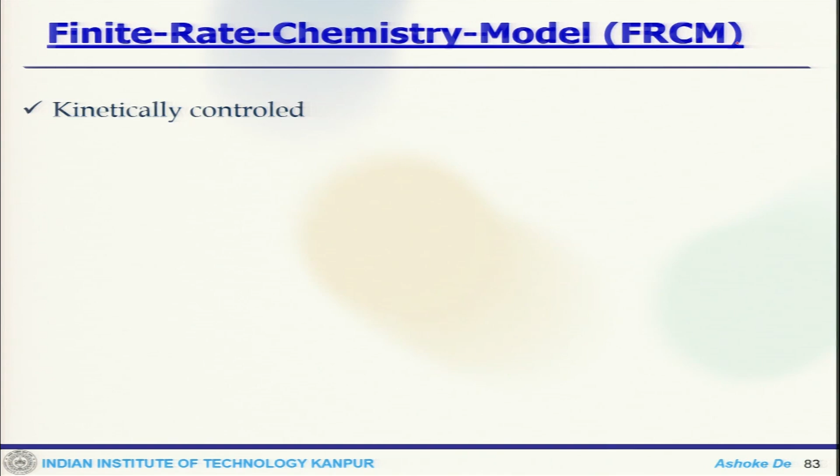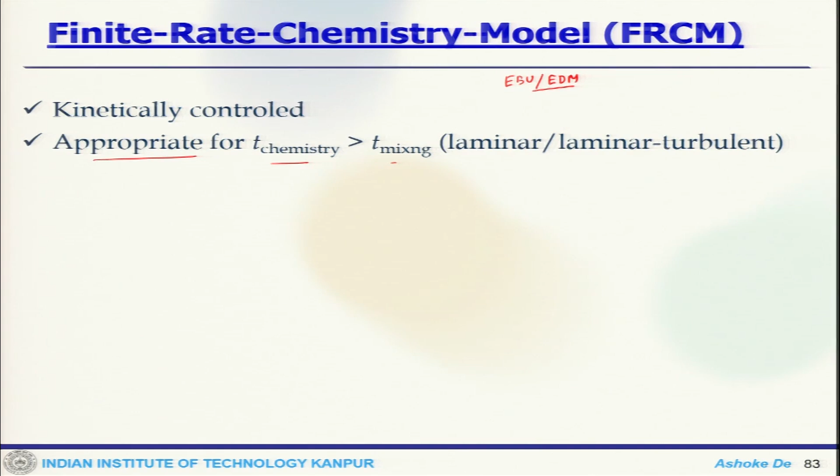Now we will look at the finite rate chemistry based model. This is more or less detailed. One important thing is that previously, when we talked about the EBU or EDM, they are more or less mixing controlled, but this one is kinetically controlled. It means the chemistry actually controls the whole physics. So here it is appropriate if the chemistry time is higher than the mixing time. That means it becomes a laminar or laminar-turbulent interaction kind of situation.

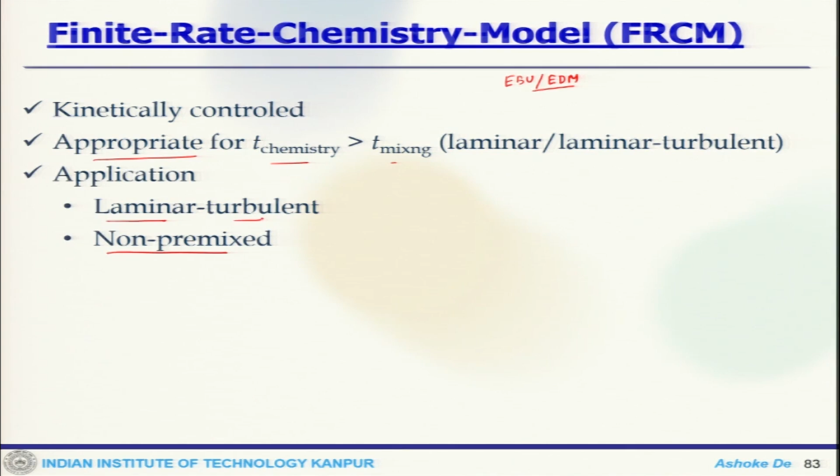Now one can think about the applicability. It can be used in non-premixed mode, laminar case or turbulent case; in either situation this is applicable. And the source term uses the Arrhenius expression. We use the mean values for the temperature in the Arrhenius expression, but importantly, in this case the effect of turbulent fluctuations is ignored. So this is one thing which would be missing when we actually close the source term.

And also when you look at the local temperature, that is also quite low. Compared to the previous models, these are some of the issues that come up here, that it does not account for those things. And also the consideration of non-equilibrium effects and all these things are also missing.

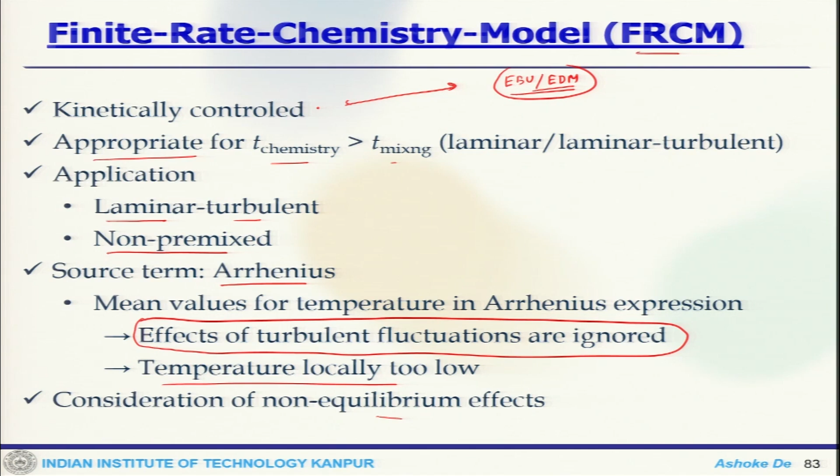So we have looked at the issues of EBU and EDM, and EDM is more mixing controlled, while FRCM is kinetically controlled. So these two are sort of contradicting each other. Now if one combines these two, that would probably be the best possible combination for applications. That is why we talk about this combination of EDM and FRCM. Then we can use it for turbulent flow with high turbulence and intense mixing, and also a laminar structure can be handled easily, because we are trying to take the advantage of both these models.

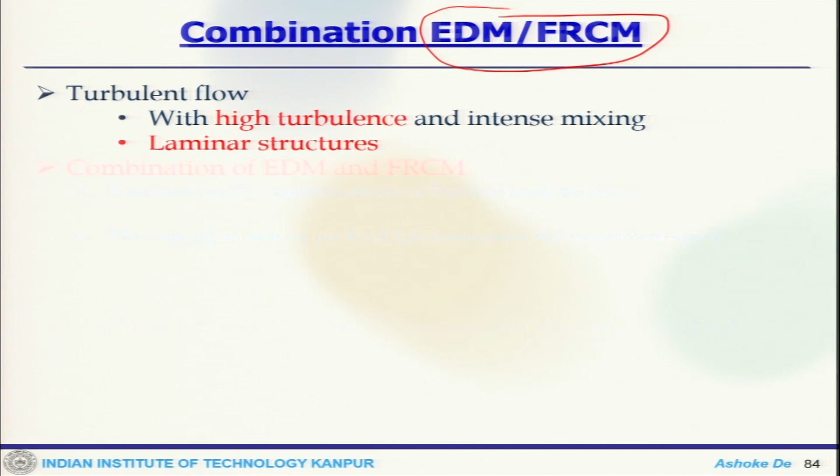So the advantages of these two models are used to get this closed. When you combine them, for each cell the computation of both reaction rates is done: one using EDM and one using FRCM. Then, to determine the reaction rate, we pick the smaller of the EDM and FRCM rates, and look at the local chemistry and mixing control situation, whether it is a kinetically controlled situation or a mixing controlled situation.

So obviously you get some advantages and you also pay some price. There is a large range of applicability. This is one of the biggest advantages; once the application range increases, that is one of the best things one would expect. But the disadvantage is that there is no turbulence chemistry interaction. So though we are coupling these two models and taking their advantages, there still remain some issues.

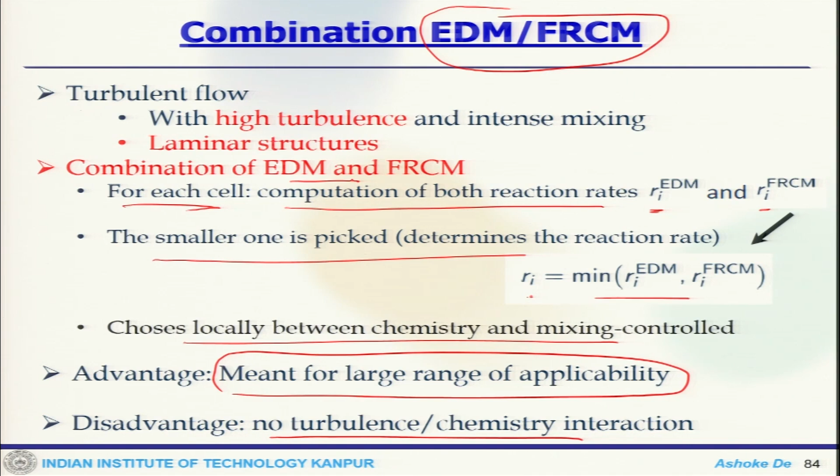So the further modification which was proposed is the eddy dissipation concept, which is an extension of the EDM. EDM does not take into account detailed chemistry, but EDC can consider detailed reaction kinetics. That means it can take multi-step reaction chemistry into consideration.

What it does is, if you have a computational cell like this, you divide it into a small section. This is your reaction zone and this is your mixing area. So the cell is divided into two segments. One is the reaction zone, which is a fine scale structure; these reactions happen on the small scale, called the fine scale, and that is estimated like this. C_xi is the model constant, and the volume of the cell would be xi cubed.

So, reaction rates are determined by obviously the Arrhenius reaction, because that takes into account all the detailed chemistry, and then the time scale of the reaction, which is also estimated as tau, which is C_tau into square root of nu by epsilon. This is also a model constant.

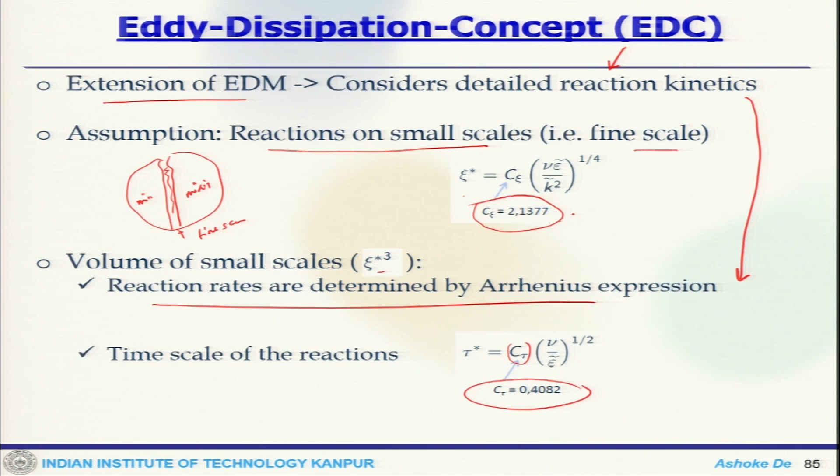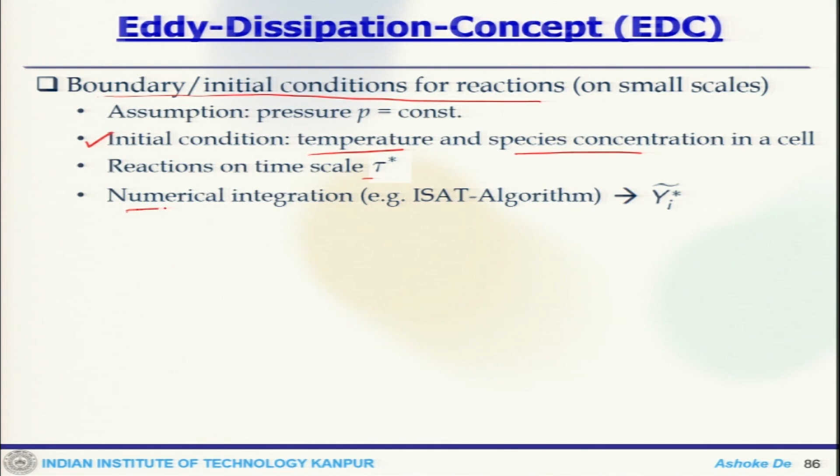Now, once you have this, you need the boundary and initial condition for the reactions. So, one of the assumptions is that you have a constant pressure situation, that means it is sort of an isobaric combustion, and then you need some initial condition which is quite important, that is for temperature and the species mass fraction or molar concentration, whatever it is. Then we need the reaction time scale and then the numerical integration. One of the algorithms proposed by Pope is the ISAT algorithm, which is quite efficient for this numerical integration.

Still, if you look at it globally, this has a huge advantage from the application point of view. It can be applied to premixed, non-premixed or partially premixed cases, but it has problems when you apply it using detailed kinetics. Obviously when you use more detailed kinetics, your computational cost would go up. So, the resource requirement becomes quite high, and at the same time the integration of the reaction source term will lead to stiff differential equations when we try to integrate the species mass fractions.

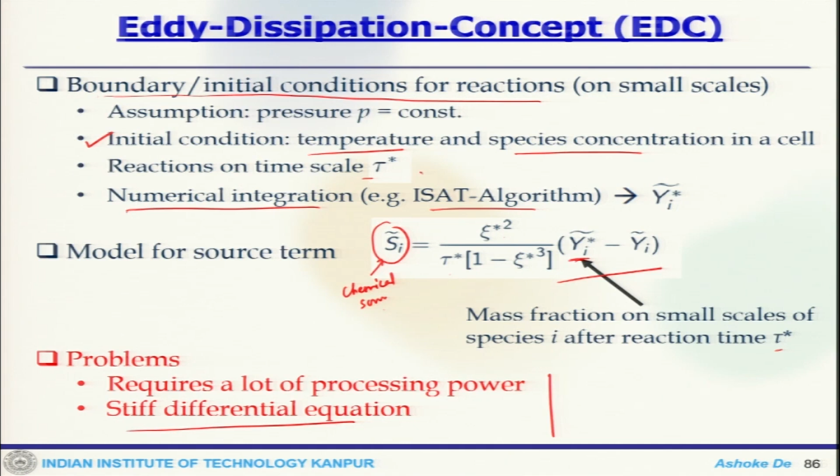But there are ways to handle it, because these days computational power is quite handy due to the advancement of the architecture and all these things. But the differential equation solver is another area of concern, where actually the ISAT algorithm has been found to be quite effective.

Now, if we sum up the discussion of this first part, first we look at the laminar finite rate, where the major issue is that turbulence is not considered, and the reaction source term is calculated by the Arrhenius equation. Now, if you go to finite rate or eddy dissipation, there again we use the Arrhenius expression for the calculation of the source term, and we calculate the mixing rate, and the local choice of whichever is limiting is used. Now the eddy dissipation is solely a calculation of the mixing rate. Here the kinetics is not considered.

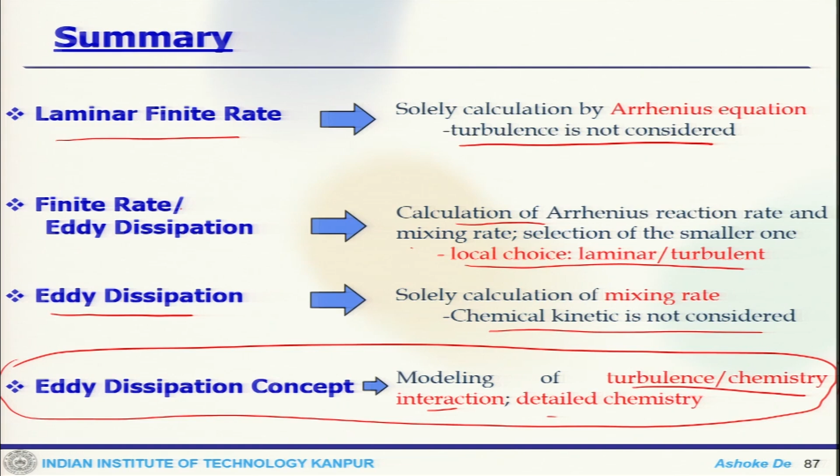So, this case is mixing controlled, and then finally we get the eddy dissipation concept, where the actual interaction between turbulence and chemistry is taken into consideration, and detailed chemistry can be used. So, all said and done, this looks quite advantageous, and the applicability is also quite high, because one can use this particular model irrespective of mode of combustion. The reason is it solves individual species mass transport equations. So, that gives you the simple models.

Now, we can look at slightly advanced models, which are statistical based methods. So, that would also be quite handy. This set of models we discussed here can theoretically be applied to any mode of combustion, obviously with some advantages and disadvantages, and then there are the ones which are very specific to a particular mode of combustion.

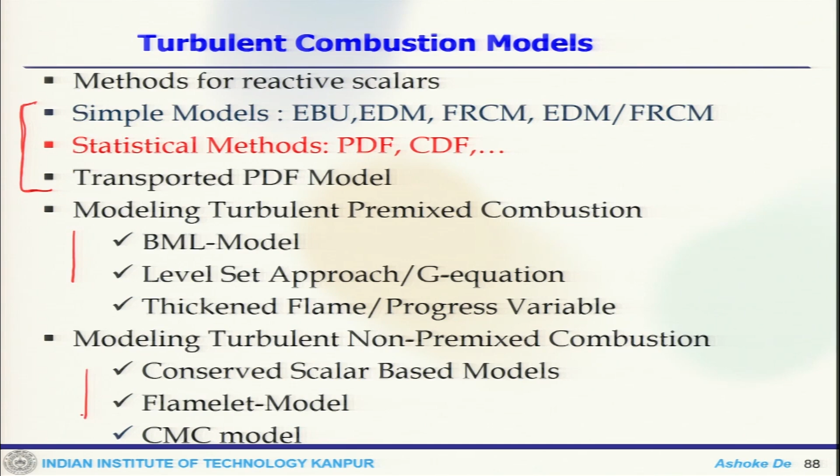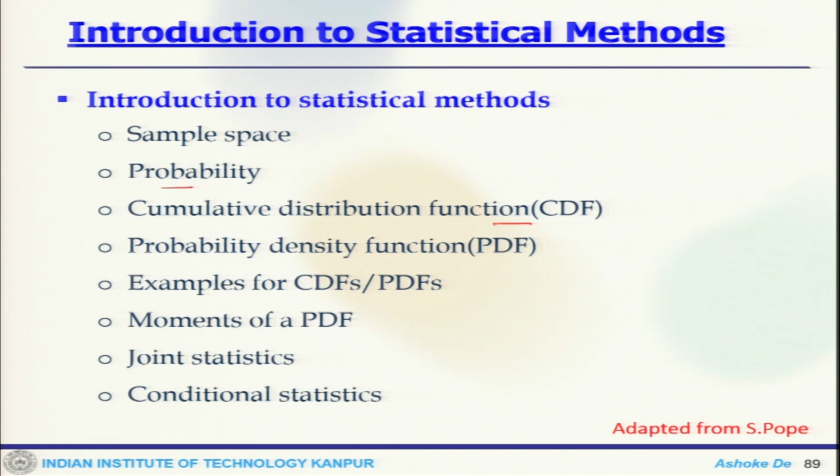Now, we move to the statistical methods, where we can see what the sample space is, what the probability is going to be, the cumulative distribution function, probability density function, moments of the PDF, joint statistics, conditional statistics. These are some of the terminologies required for statistical based models, and this is primarily adapted from Pope. So, now we can look at the probability of an event, the probability in a sample space.

So, what is sample space? Sample space is nothing but the set of all possible events. Now, for a velocity field, you can think of a random variable u, and then the sample space variable v, which is independent of the variable.

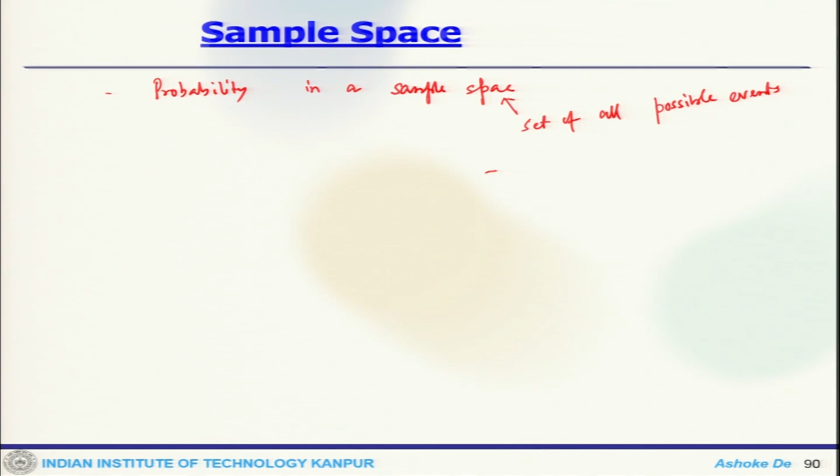For example, if this is my sample space variable v, and this is, let us say, event A, then A is u less than V_A. Similarly, one can look at event B, where in this sample space there could be V_A and V_B, and event B is where V_A is less than or equal to u less than V_B. So, this is how you define the sample space.

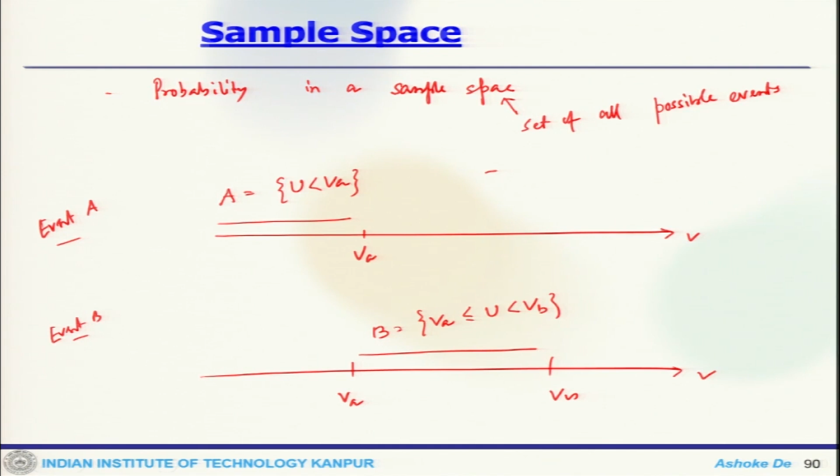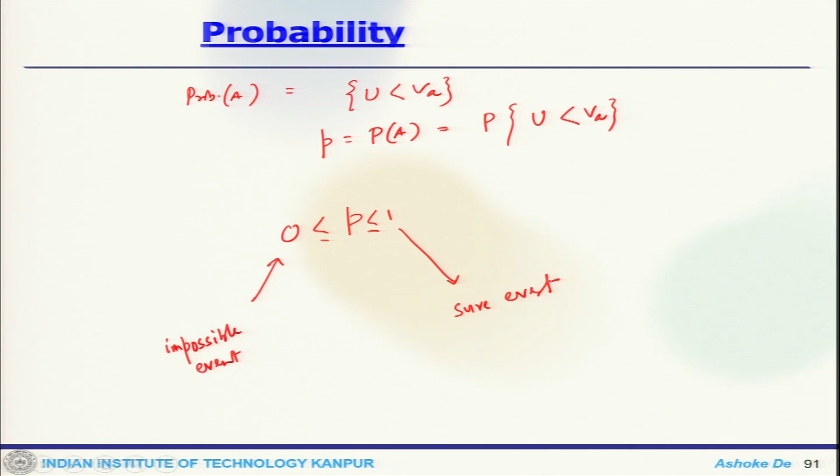Now, the probability of event A would be u less than V_A. That means P(A), the probability of A, is P(u < V_A), and the probability P lies between 0 and 1. When it is 0, it is an impossible event, and when it is 1, it is a sure event. So, that basically demarcates between the two sets.

Now, we look at the CDF, or cumulative distribution function. The probability of any event can be determined from the CDF. So, let us say F(V) is the probability of U less than V. We looked at V_A, where event A is U less than V_A. Then P(A), the probability of A, is P(U < V_A), which is the cumulative distribution function of V_A.

Similarly, for event B, which lies between V_A and V_B, B is V_A less than or equal to U less than V_B. That means U lies between V_A and V_B, and P(B) can be written as P(U < V_B) minus P(U < V_A), essentially the subtraction. So, that is F(V_B) minus F(V_A). That is how one can write two different probabilistic events.

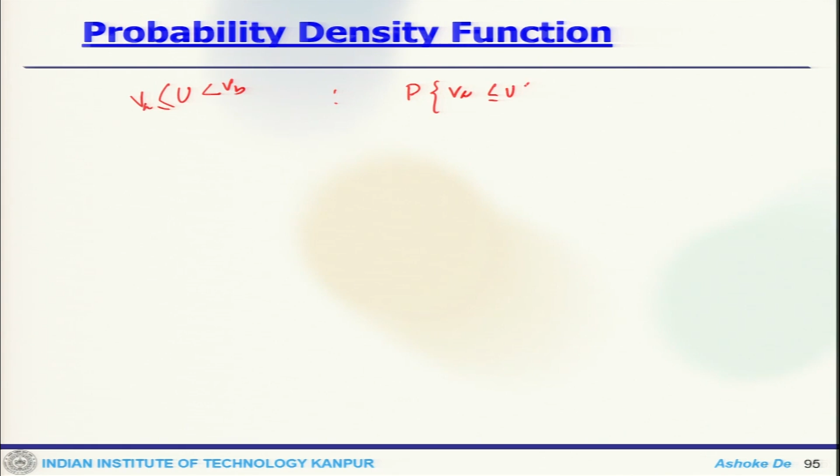So the probability was VA less than U less than VB, which was F of VB minus F of VA. That one can write as the integral from VA to VB of f(V) dV. So if I schematically look at it, this is 0, let us say VA, VB. So the curve, let us say, goes like that, that is 1, this is my F(V).

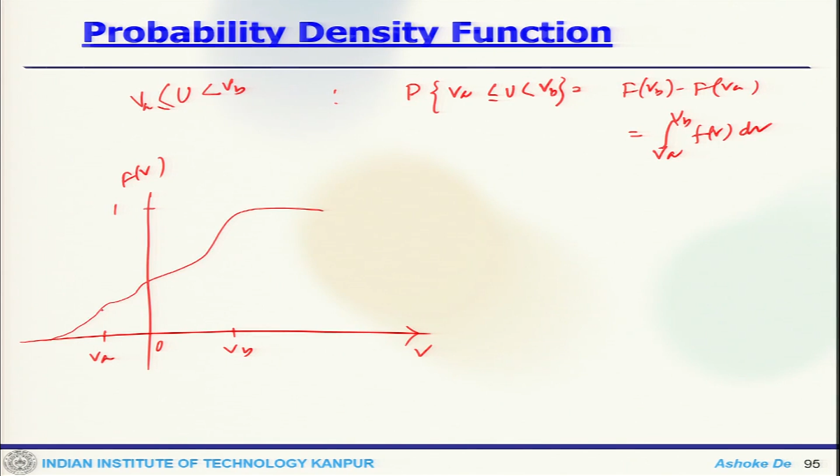So this is my distribution of this guy, and the same thing when I put it back: 0, this is my space V, this is VB, this is VA.

So this is the part which corresponds to it. So in the interval where VB minus VA tends to 0, the probability will be F(V plus dV) minus F(V), which is f(V) dV. So that is how you get the PDF.

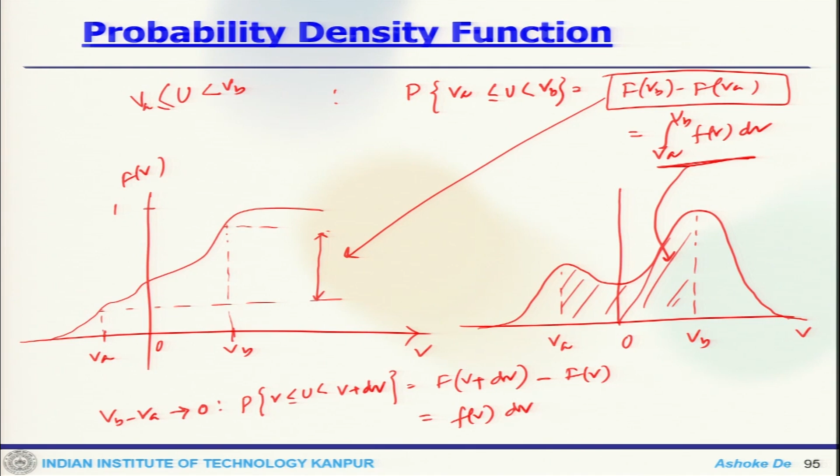Now you can take some examples, like this is a CDF and this is the probability density function. So this is a uniform distribution where the probability distribution between A and B would be 1 by (B minus A), otherwise 0. So this is how it looks, and this is how the CDF varies. So this is a uniform distribution.

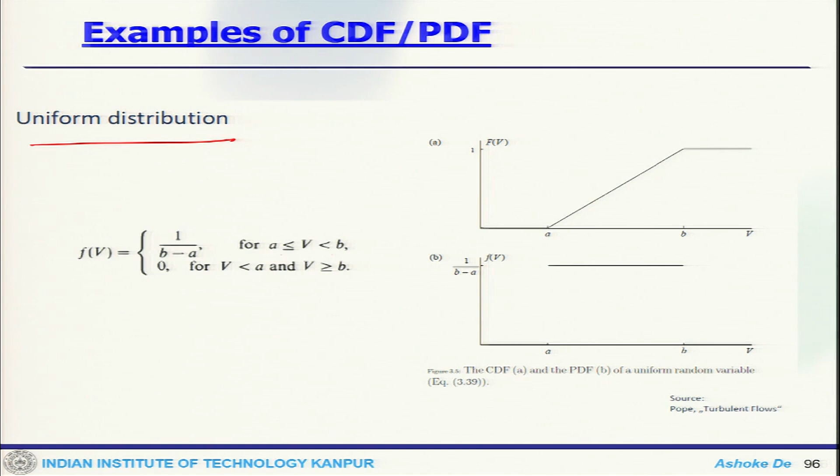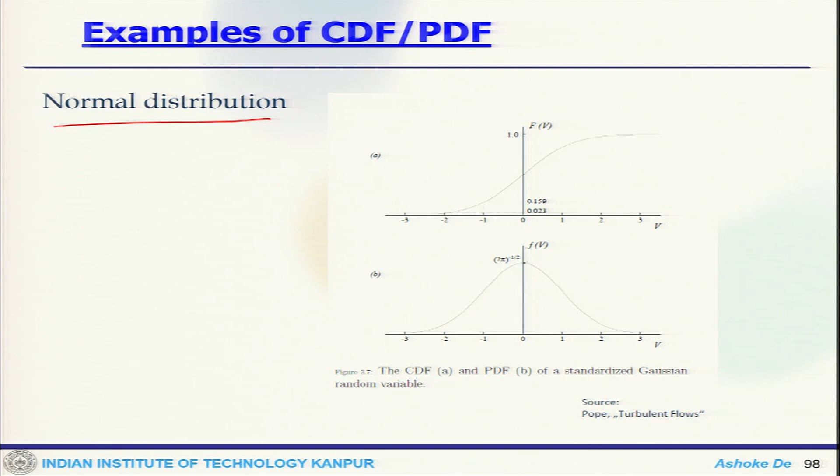Now, if you have, for example, a delta function distribution, that means the CDF is applicable here and applicable there. So, for V less than A it is 0, from A to B it is P, greater than B it is 1. So, that is my CDF. So, this can be written like a function. Now, for the probability distribution, at this point there would be a peak, at this point there would be a peak. So, this is my probability density function of that.

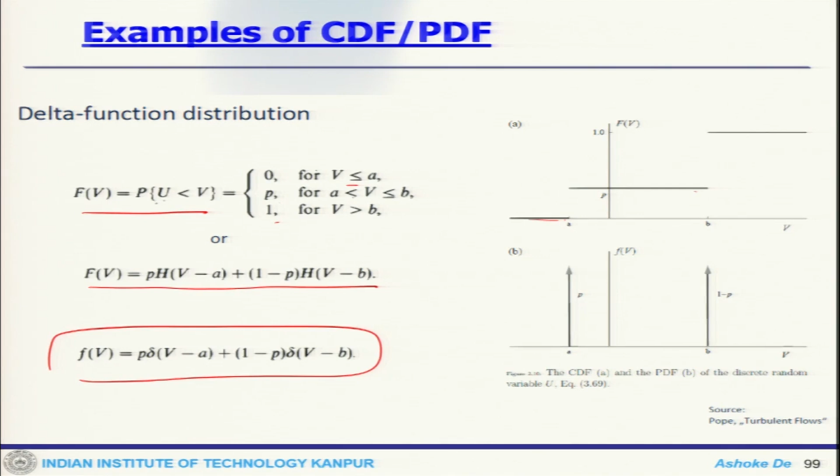Now, let us say the PDF of u is known, then we can find the nth moment. How do you find that? The nth moment would be the integral of v to the power n f(v) dv, and for Q, this is minus infinity to plus infinity Q(v) to the power n f(v) dv, which is the random function with Q equals Q(u).

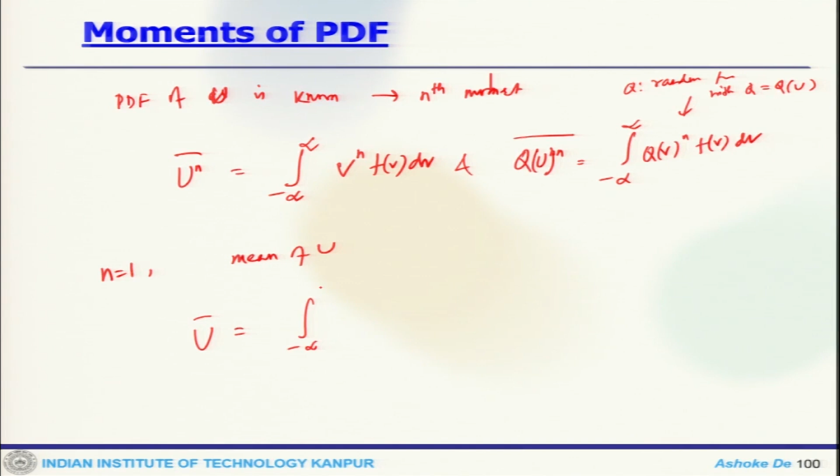Now, you can take the first moment: if n equals 1, then this would be the mean of u. So, u bar would be minus infinity to plus infinity v f(v) dv. Similarly, you can find the nth central moment, which is, let us say, (u minus u bar) to the n, the integral from minus infinity to infinity of (v minus u bar) to the n f(v) dv.

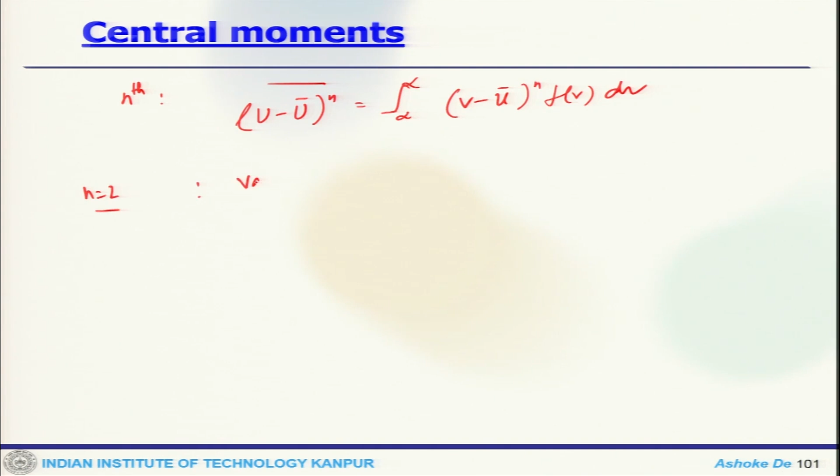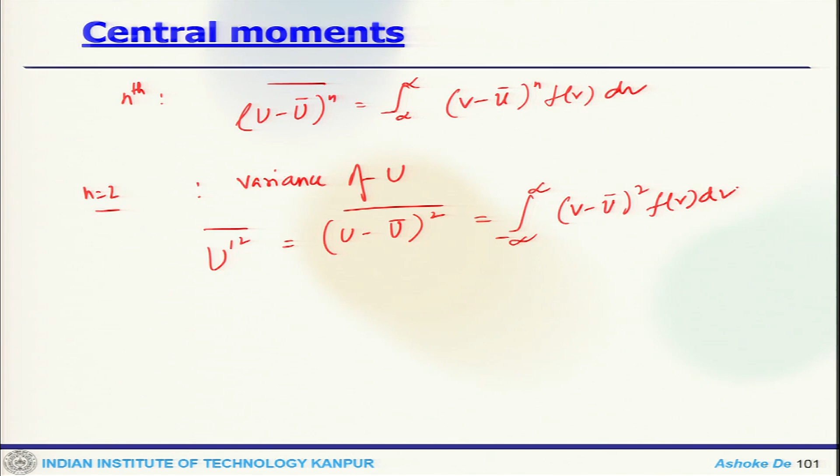So, n equals 2 will give you the second central moment, which is essentially the variance of u, which gives you u prime squared, (u minus u bar) squared, which is the integral of (v minus u bar) squared f(v) dv. So, from the PDF you can find these out.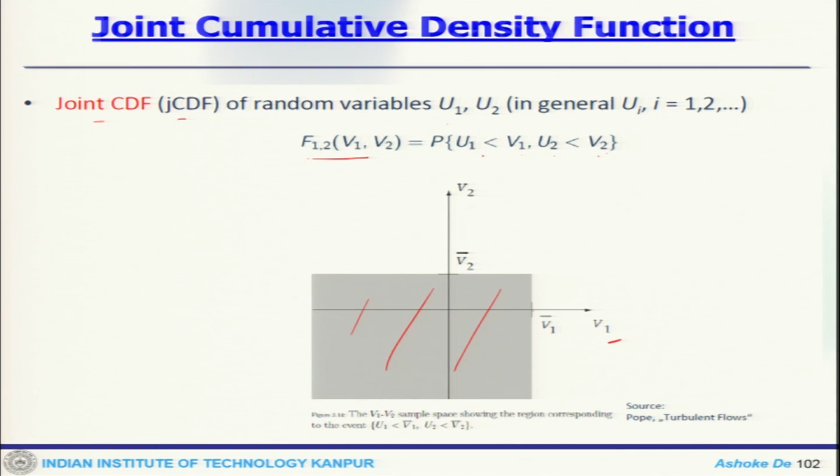Now, we can look at the joint cumulative distribution function. So, that is the joint CDF of random variables u1, u2 in general. So, the joint CDF would be written as the probability that u2 is less than v2 and u1 is less than v1. So, this is the distribution of v1, this is the distribution of v2. So, the joint CDF will belong in this particular space, because this is lower than v1, lower than v2. So, this is the area, that means it is dependent on two spaces.

Now, some properties of that: this is a non-decreasing function, that means F12(v1 plus delta v1, v2 plus delta v2) is greater than F12(v1, v2) for all delta v1, delta v2 greater than 0. Now, since u1 less than minus infinity is impossible, F12(minus infinity, v2) equals the probability of u1 less than minus infinity and u2 less than v2, which is 0.

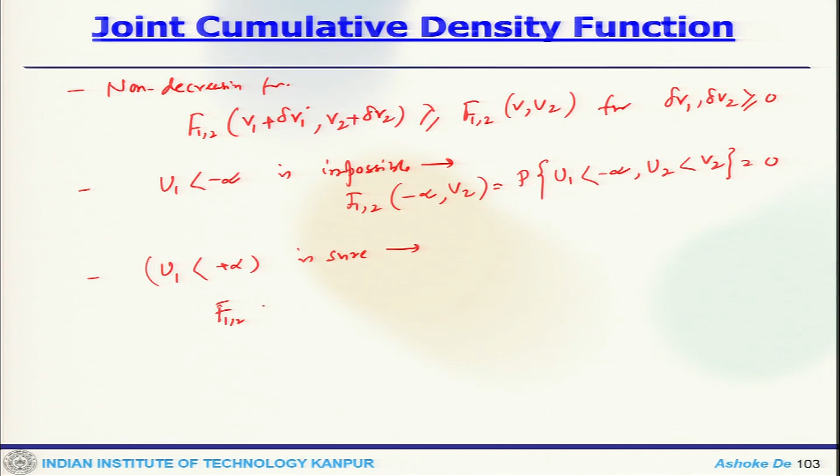Also, u1 less than plus infinity is sure, so you get F12(plus infinity, v2) equals the probability of u1 less than plus infinity and u2 less than v2, which gives you the probability of u2 less than v2, that is F2(v2). So, one can think about a marginal CDF, which means F1(v1) equals F12(v1, infinity). So, these are some of the properties of the joint CDF.

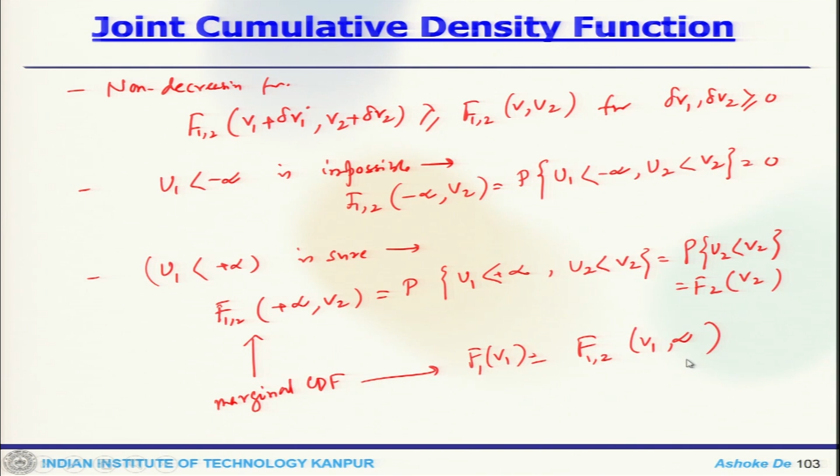Now we will look at the other properties in the next class. We will stop here today.